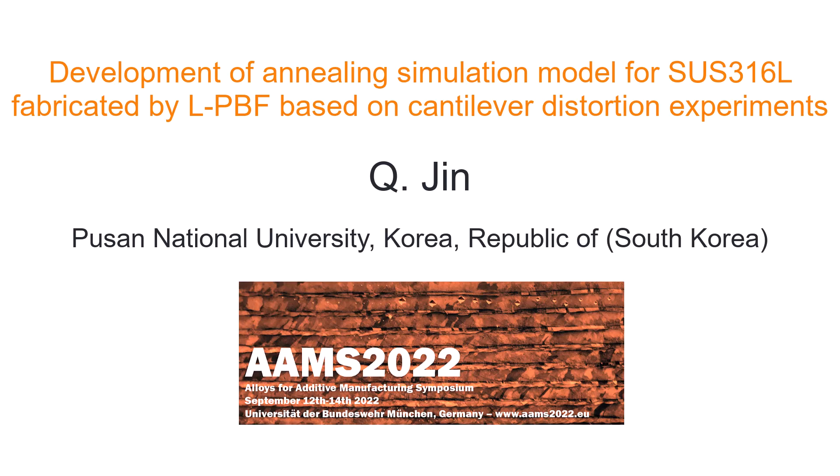This is development of an annealing simulation model for the stainless SUS316L alloy fabricated by L-PBF method, based on the cantilever distortion experiment and the simulation.

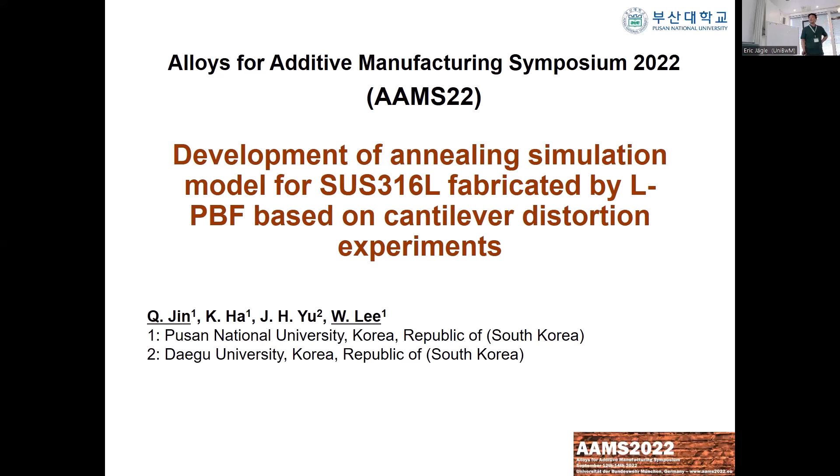This talk was actually supposed to be given by one of my PhD students, Q. Jin, but because of a visa problem, he is Chinese and needed a visa to enter Germany, and couldn't make it here. So I'm presenting instead of him, and I studied this very hard in the last 2 days. Maybe I can do my best.

This talk is about the laser powder bed fusion process, which is one big topic of this whole conference.

I assume everyone is familiar with this, but I would like to emphasize that in some cases, dimensional accuracy matters in some components. For instance, in the impeller, near the joint to the other component, dimensional accuracy may not matter because we have to machine it anyway for the joint. But here and here, the dimensional accuracy or simply the shape influences the overall performance.

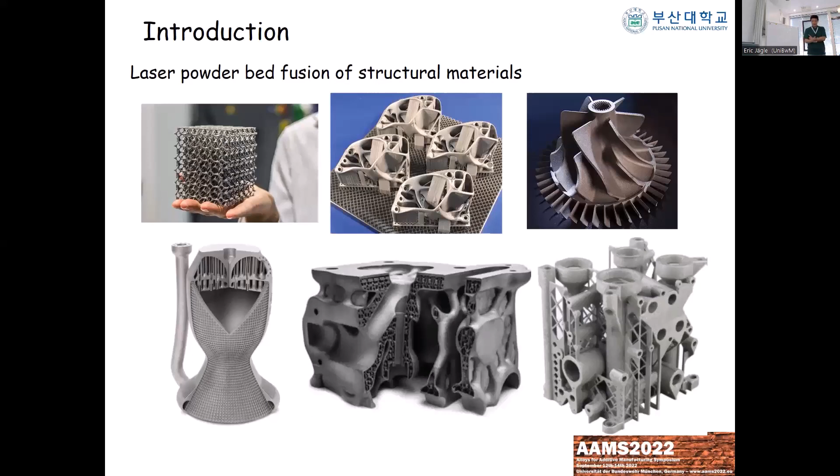Or this part, for instance, has some joint parts here with bolt holes. Imagine that if the whole part is distorted during the cutting job from the base plate, then we cannot connect and join this part. So sometimes dimensional accuracy is one critical factor that we should consider.

And there's always some residual stress issue in the laser powder bed fusion system. Depending on the three-dimensional shape of our component, we more or less always have complex residual stress inside our component in the as-built state.

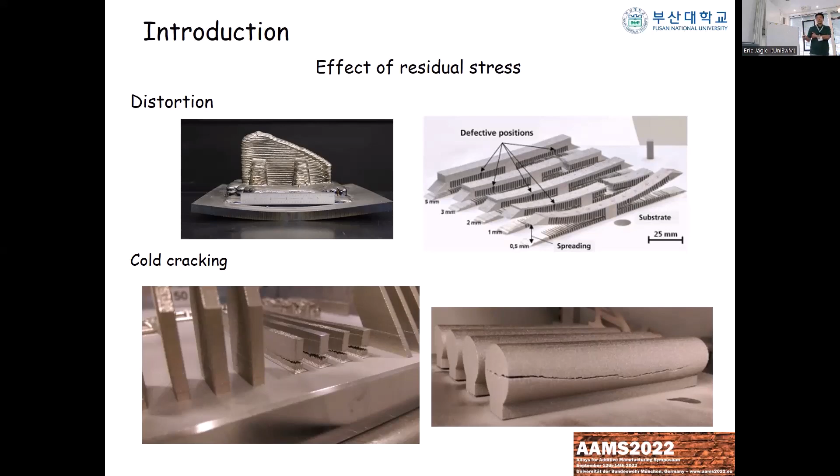This can produce some distortion when we cut the component from the base plate, or in the worst case, in brittle material, sometimes cracking as well.

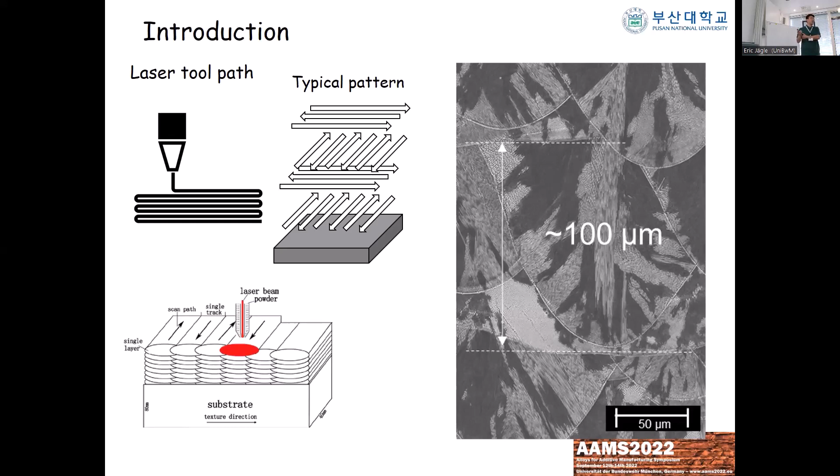There are many studies that control the residual stress by optimizing the laser pattern or adjusting printing parameters such as laser power. But this is basically unavoidable because we are depositing hot material on a cold substrate or previously deposited layer, and this shrinks. So there's always strain mismatch, and we have some amount of residual stress. Maybe we can reduce it, but we cannot completely eliminate it during the process.

So if the component is very sensitive to dimensional error, like the impeller or heat exchangers with two joints, then to prevent distortion we normally have to go for heat treatment. The annealing heat treatment can effectively relieve the residual stress.

When we go up to high temperature for a long time, we can more efficiently remove the residual stress. But the hardness and yield strength are normally reduced when we increase the heat treatment temperature and make the heat treatment time longer.

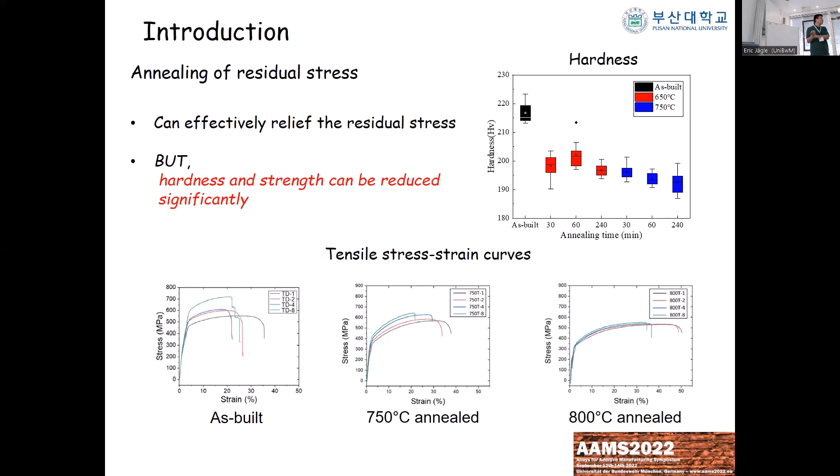So there will be some kind of optimum condition where we have small enough residual stress that we don't have a distortion problem, but we keep the required hardness and yield strength. That's why we thought it would be very good to have some kind of predictive model for the evolution of residual stress, depending on the three-dimensional geometry of the component. This was the goal of this research.

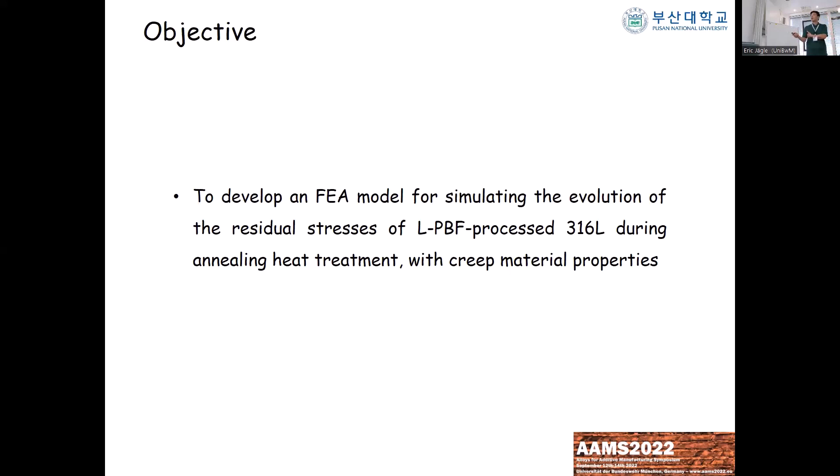We started this work first for the very common material of 316L stainless steel fabricated by powder bed fusion. We used default laser parameters with the Japanese Sodick laser system, which is a replication of the concept laser M2, so the specifications are more or less the same. We didn't change the parameters for this research; we just used all parameters recommended by the machine manufacturer.

To develop or measure the residual stress, we first had to find an efficient way to experimentally measure it. That's why we designed a special structure which we call a cantilever, which is quite common in measuring residual stress.

We have a cantilever beam above, connected with supporter legs. While printing those supporter legs, they are free to move in the lateral direction, so they don't have any residual stress in this direction. But as soon as we print the first layer, the second layer will shrink, and there will be a force balance between the first and second layer, again and again, and finally we develop complex residual stress.

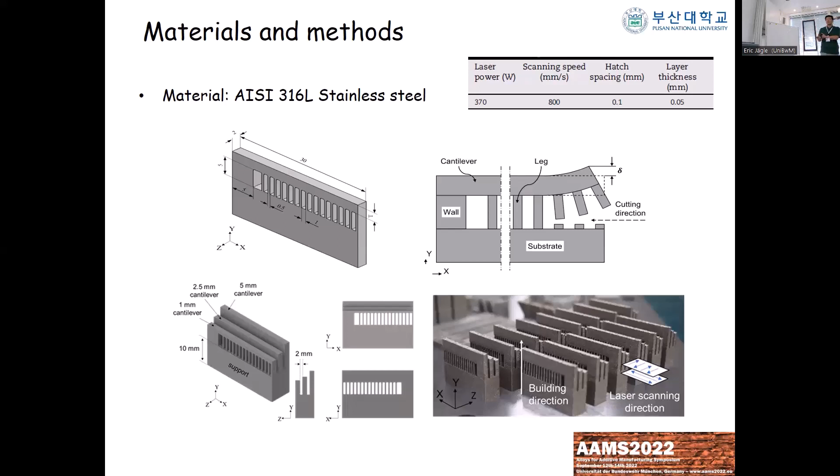We modulated this for easy heat treatment, so one module has 3 different cantilevers with 3 different thicknesses. We put it in the oven for heat treatment, and then we cut it, and get all the information from the 3 cantilevers with 3 different thicknesses.

This is our basic model. I will not go into all the details, but basically it works like this: this is a finite element model, a structural analysis. First, we deactivate all the important parts by considering the material to have near zero stiffness, so it's basically some kind of liquid. Then we activate material layer by layer, and artificially shrink it by a defined amount.

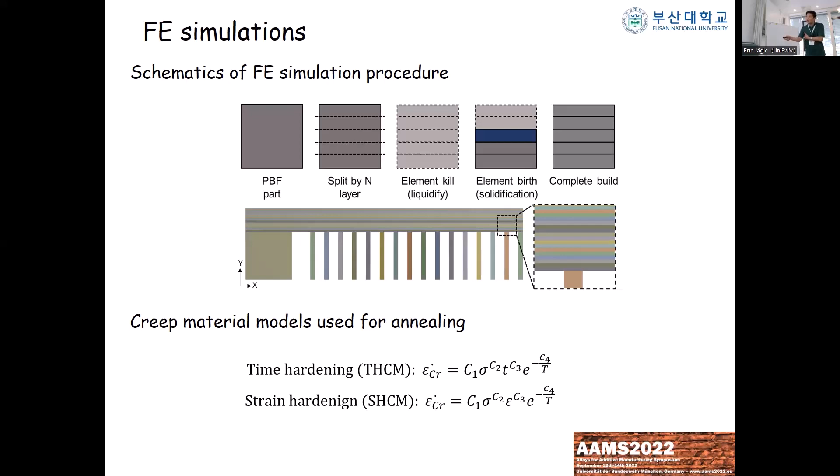So that is the replication of the process, where we consider the material being deposited layer by layer, and then it's shrinking again and again, something like that. This is not special, it's already published research in the literature, but what was special is that to consider the annealing process, we used creep material models. We used two very popular creep material models, time hardening and strain hardening, having different creep parameters. One, the creep hardening depends mostly on the creep time, and the other on the creep strain. That is the only difference.

From now on is research and discussion. Here is our cantilever after cutting the legs. You can see the distortion while cutting the legs, and here in the graph we have number of legs cut on the x-axis, and on the y-axis is the deformation. So we are cutting the legs and measuring the deformation of this part upward, and then we plot it here.

As we can see, when the annealing temperature was 650 degrees C, in the as-built state we have a large amount of distortion. With increasing heat treatment time, as expected, the distortion decreases because of the annealing effect. When we increase the annealing temperature to 750 degrees C, the annealing effect is more pronounced. That is also as expected.

But one interesting point here, as a material scientist, is that we cannot completely eliminate the residual stress at this temperature. When we look at the microstructure, at this temperature for this material we are basically getting dislocation climbing only - rearrangement of the dislocations - so we cannot completely remove the residual stress, although we do have some diffusion.

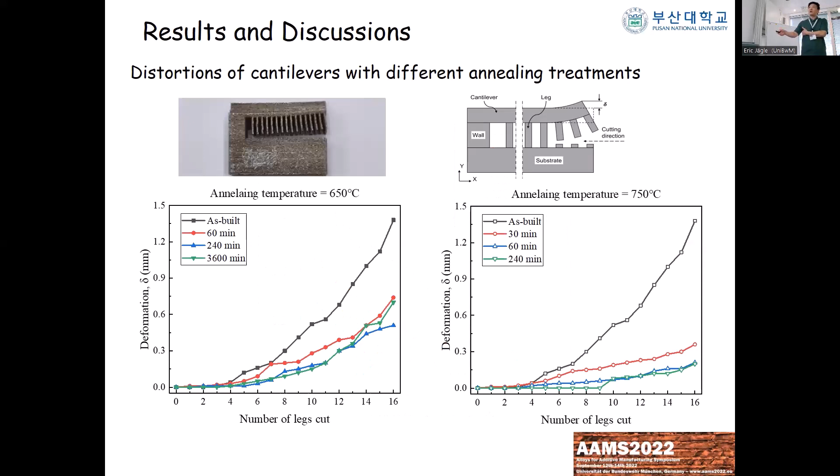So here we plot the final distortion after cutting all the legs and do the comparison. On the x-axis we have annealing time and on the y-axis we have deformation. The closed symbols represent the heat treatment temperature of 650 degrees C, and the open symbols are for 750 degrees C. What we could see is that depending on the annealing time and temperature, the final distortion decreases, meaning the residual stress is decreasing as expected. Another thing is that the deformation also depends on the thickness of the cantilever, because the thicker the cantilever beam is, the stiffer it is, so it's more difficult to bend.

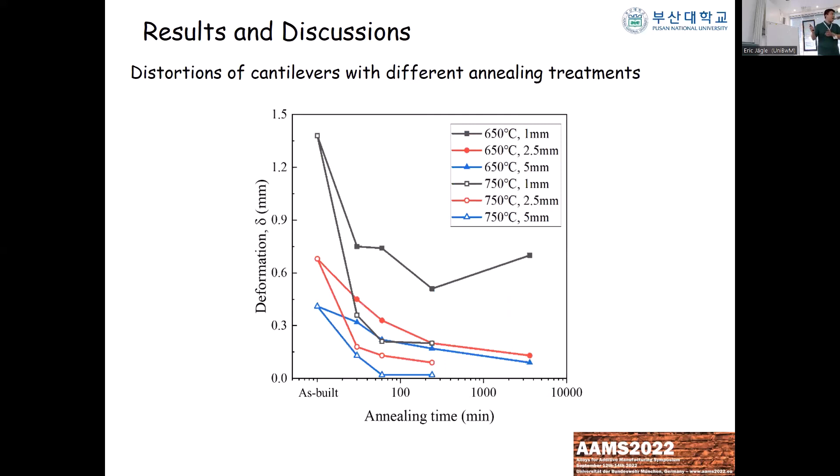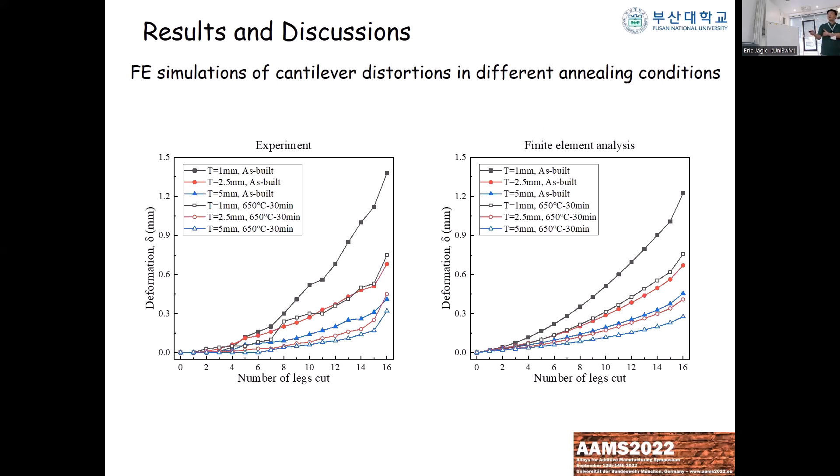Here is the experimental deformation for selected points, and here is the fitted model. We can see that here and here, those are the corresponding simulation results, and the results are very well represented. This is the overall figure comparing the experimental distortion with the calibrated time hardening creep model and the strain hardening creep model.

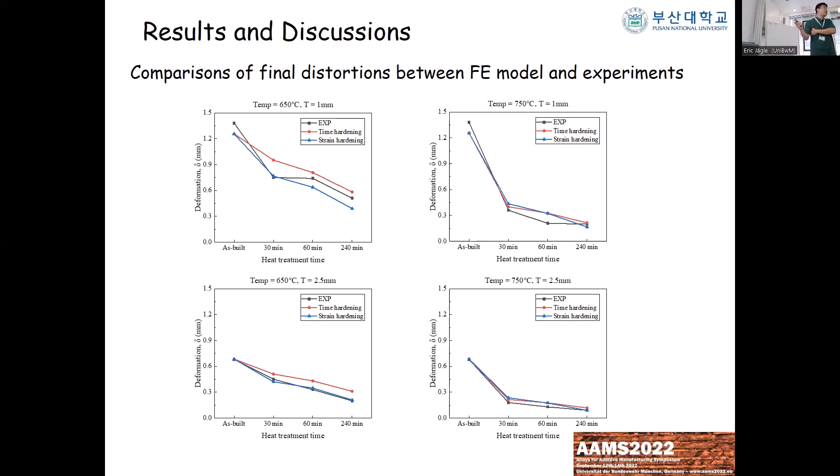As you can see, for different annealing parameters, overall the simulation model agrees very well with the experimental data. Another thing is that for this particular material, 316L stainless steel, the strain hardening model is slightly better than the time hardening model. Maybe that depends on the material, I think. When we calculated the error and compared it to all deformation, the error was something like 5%.

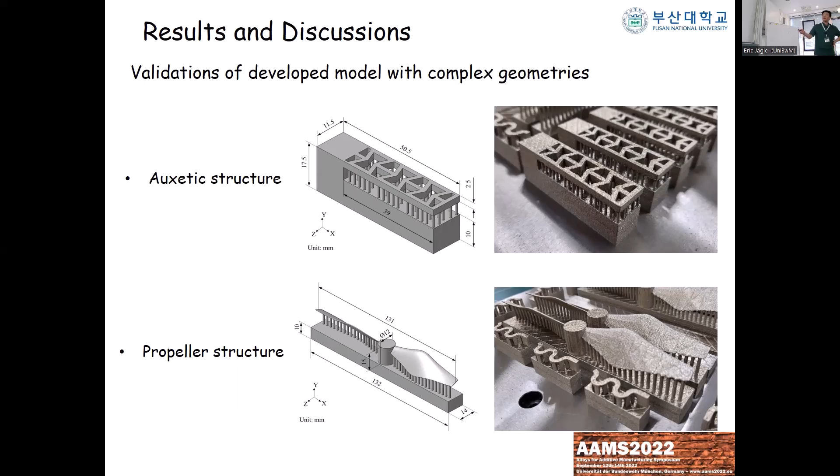Then we checked the validity of our developed predictive model. We wanted to figure out whether our model can really be used to predict the deformation of annealed structures with complex three-dimensional shapes. We designed two different special structures: one has the auxetic shape with a support structure, and one is a propeller with a support structure. And this is the final result.

This is the auxetic structure without and with the annealing heat treatment, and this is the simulation - it represents the deformation behavior very well quantitatively. Here is the deformation of the propeller shape in the as-built condition and annealing condition. This is the experimentally measured deformation by the 3D scanner, and here is the predictive model - we can see the distortion is very well agreed.

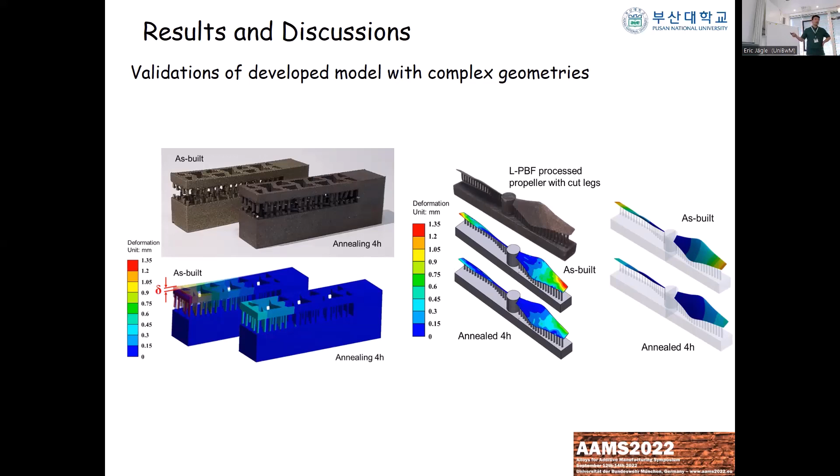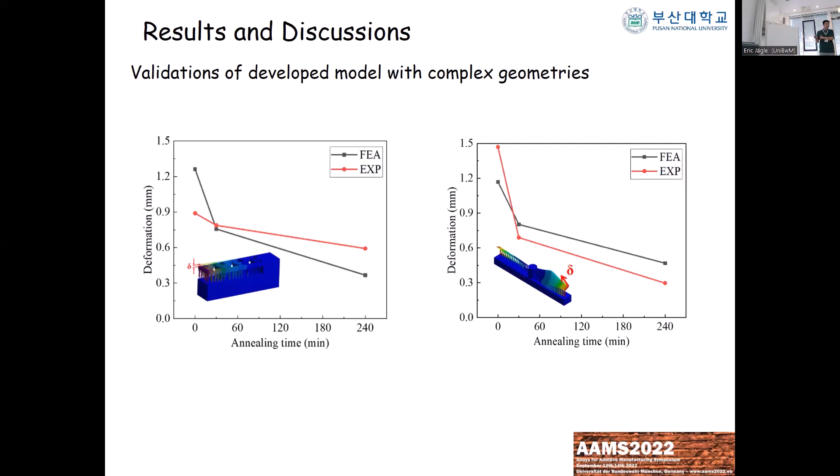In summary, a finite element model was developed to predict the evolution of residual stress during different annealing conditions, and the changes of the residual stress have been predicted by the creep model, which has been calibrated by experimental data. To validate the developed model, we produced two different complex 3D structures, and it seems that our developed model works very well.